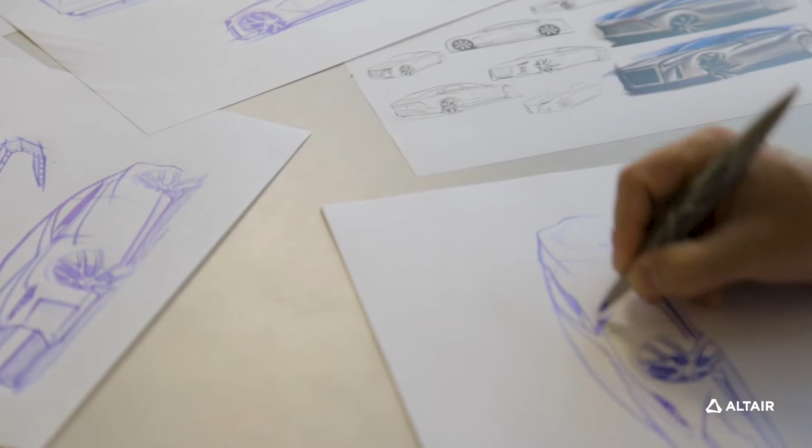Imagine being in a place where you can choose between 3 or 5 new concepts of the vehicle strictly on the aesthetics of the vehicle, because you know that each one of those ideas has been refined to hit the engineering targets.

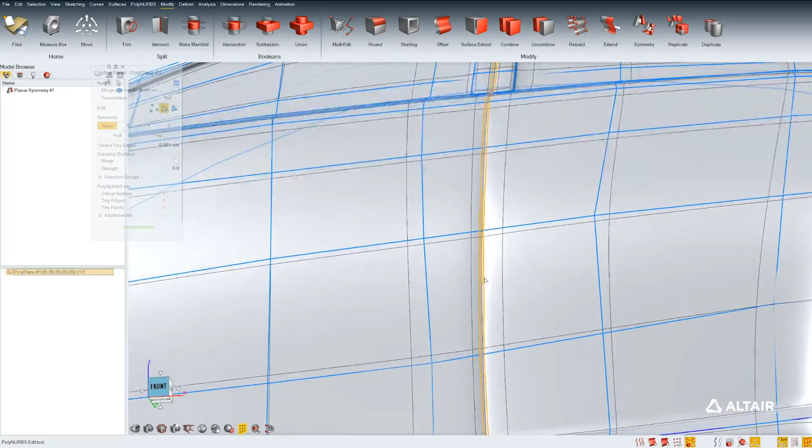We can create a new idea, an entire vehicle, an entire top of a vehicle in one day and simulate that overnight. So now you're in a position where you don't have to make these engineering decisions late in the design process when it gets very expensive, but you can really look at the engineering and the performance of the car when your ideas are still on the sketch pad. That's the time you want to make your engineering decisions.

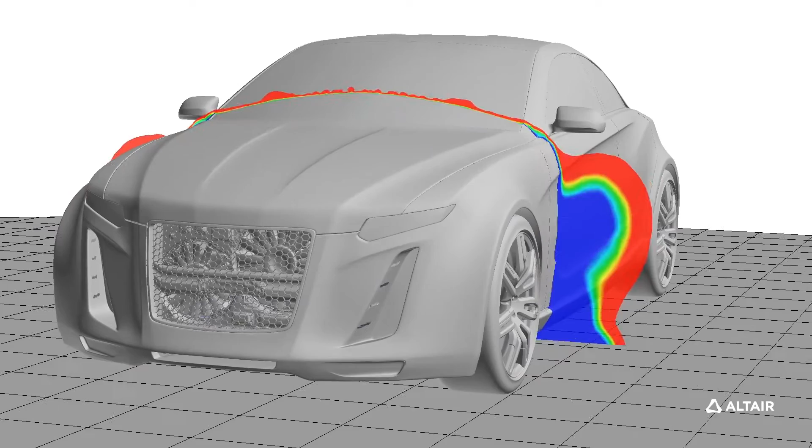Simulation is a critical part of design, to be sure, but accurate simulation is not enough. When we analyze the results, it's very important to understand why the object performs the way it does. To set up a design process whereby we can pose a question one evening and overnight come in the next morning, look at the simulation results and understand the behavior of the problem we submitted last night.

But the process goes much further than that. In that morning, when we really understand how the flow is moved over the A-pillar and around the boat tail of the car, we can reformulate our ideas on how we need to shape that car using Inspire Studio.

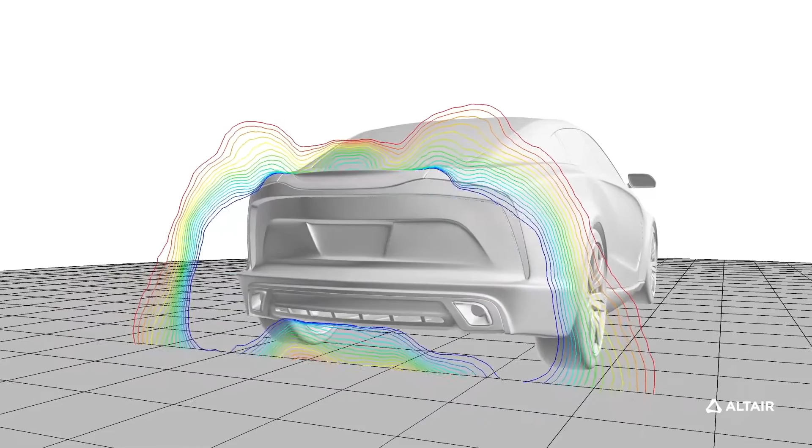So at the end of the day, it's not constricting the designer, but it's opening up a lot of design freedom. Now you're thinking in terms of the aesthetics. And the engineering becomes much easier to manage, and you manage it early when you want to, when it's easier to make compromises, and it's much, much cheaper to make those compromises.

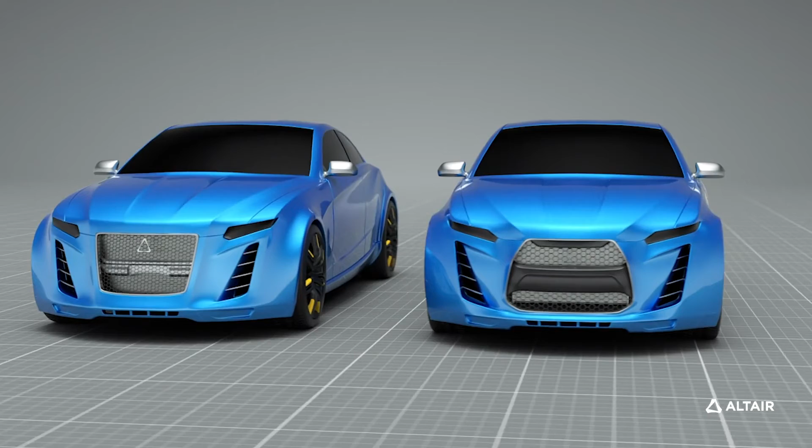Ultimately, our vision is to create an environment where people can come together and share ideas and understand and communicate with one another. Because after all, cars are designed by people, not by wind tunnels.